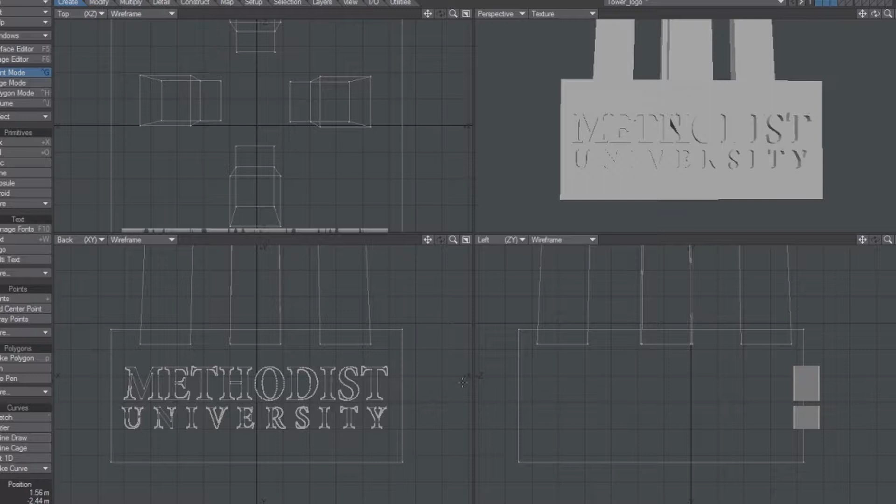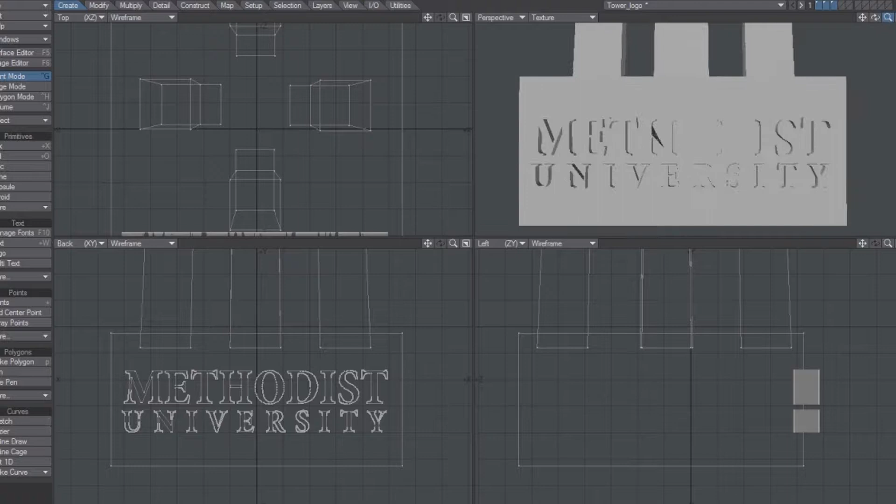Now, another issue that comes up with some fonts and some things in Lightwave is that occasionally we get some impossible geometry when it comes to text. If you look up here, you can actually see some of that. There's a little bit of an artifact right there. I don't think that's going to be a deal breaker. First of all, it doesn't really show up in the model here. It just comes into play when it tries to put it into perspective view and to make the surfaces, even double-sided. You see that there's something there. But in the case of a 3D printed object, I don't think it's going to be a deal breaker.

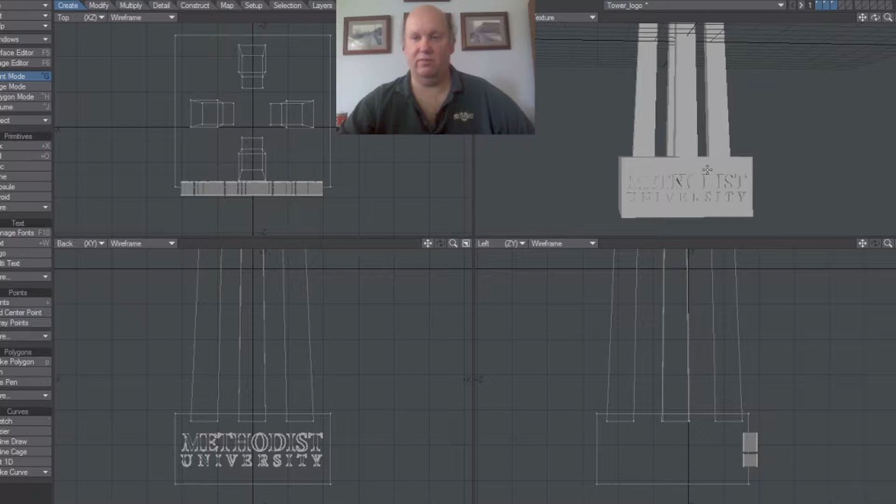Okay, so the first thing we want to do is establish what our pieces are going to be. Now, what I wanted to do is make the tower a different color than the base. So, easily enough, all I've got to do is print out the tower separately. And the base, I want to have a different color than the text. Now that's going to be a little bit more of a challenge.

That will involve printing out this block with the letters added to it as one layer, and then having it printed in such a way that it will print the bottom base first, so from here upward, and then at a certain point when it starts to get to the letters, I will pause the printer and change the color. So we're going to have yellow letters which will glow against a black block, and the tower will be white.

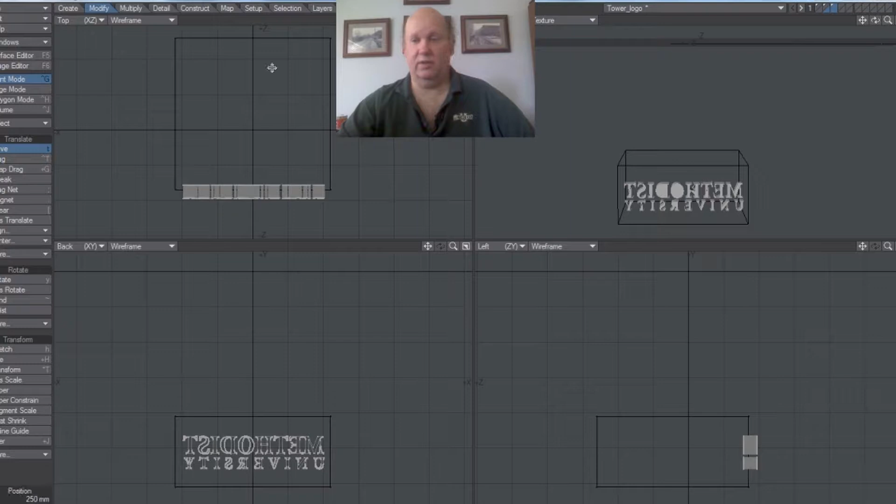So the first thing I'm going to do is adhere the letters to the block. But before I do that, remember we had an issue with the Methodist words coming out backwards. What we're going to do here is turn them around before we even get to that point. So I'm going to do a modify, rotate, and rotate those at 180 degrees. And then I'm going to move those to the front. So already we fixed that problem.

Then we're going to basically put the words in the background, do a construct, Boolean, add. And then we no longer need these. So this becomes our final product.

Okay, and so there's one other thing that we need to do here. What we want to do is make this in multiple parts. And so therefore, what I want to have is the tower actually merged with the base piece so that I can actually glue the tower parts into the bottom part there.

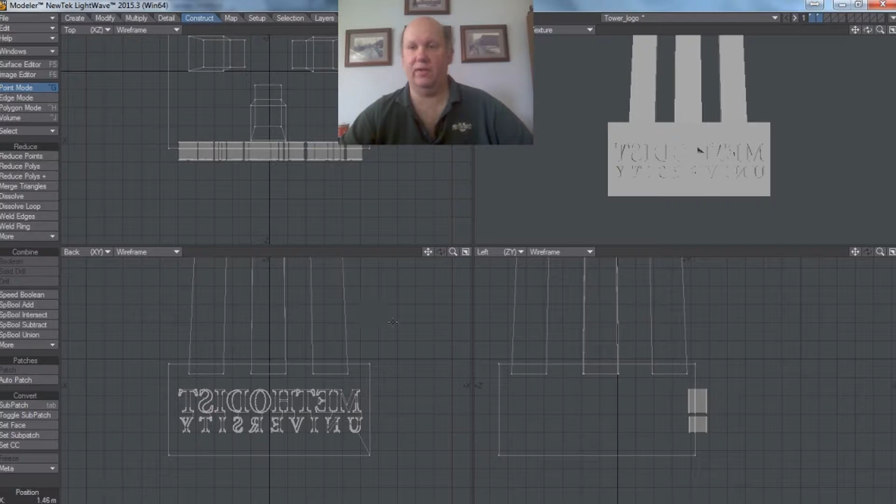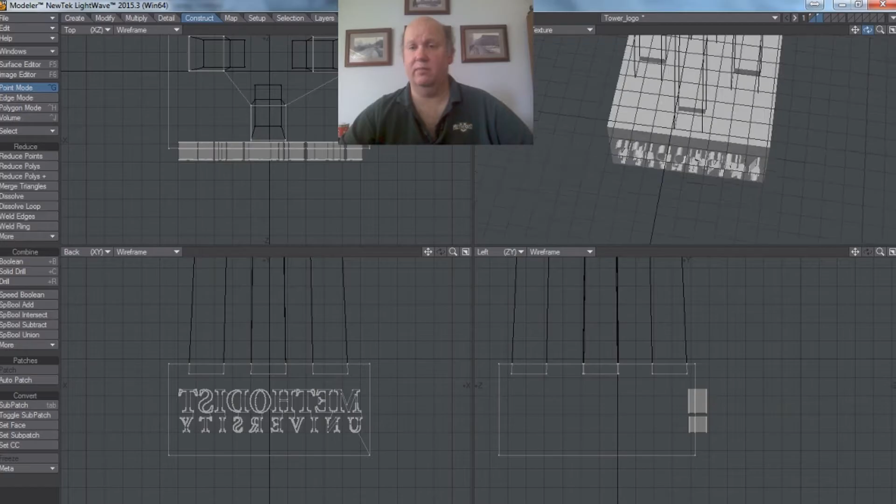So to do that, we're going to make it so that they fit. What I'm going to do is select the base piece and put the tower in the background and do a Boolean subtract. And when I've done that, you will see that the base piece now has places to accommodate those towers.

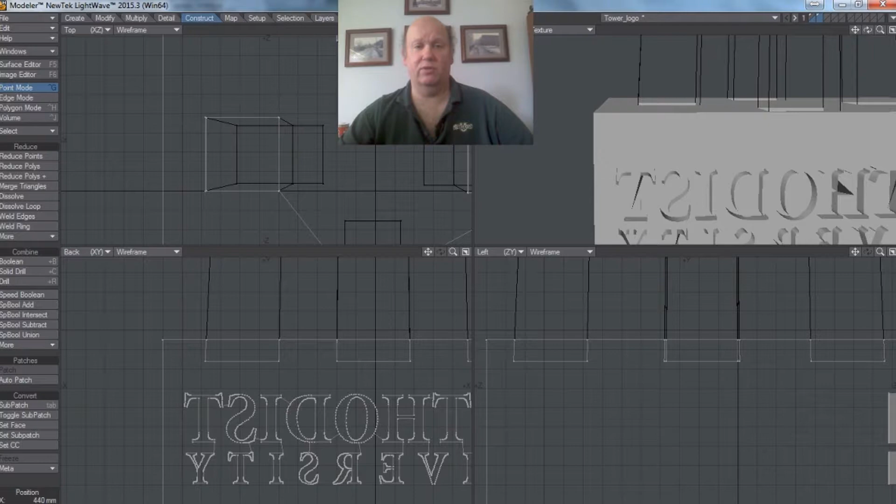So once I've done that, then it's a question of making sure that they would fit naturally. So I'm going to leave the tower in the background, and I'm going to go in on those posts. Go to the first one here, and we want to make just a little bit of a space. So I'm in point mode. I'm going to select just those points there, make it a little easier. And I'm just going to do a modify move, and just bump those up just a tiny bit. Doesn't have to be much. Then I'm going to deselect those points, select those points, and bump that out just a little bit, and bump that out that way.

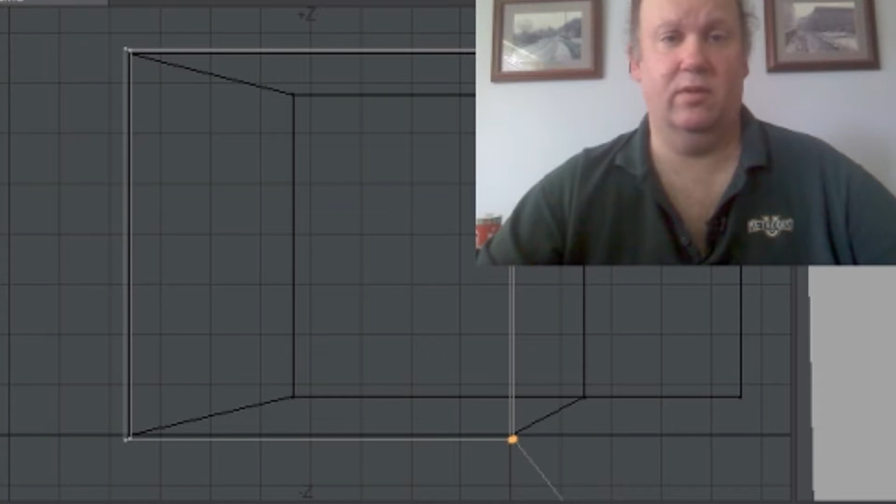And that should do nicely. Down here, you don't have to worry about the bottom one, we're going to leave that the same. But if you look close, there's a little bit of a gap between the tower piece and the legs of the little post hole that's dug for it.

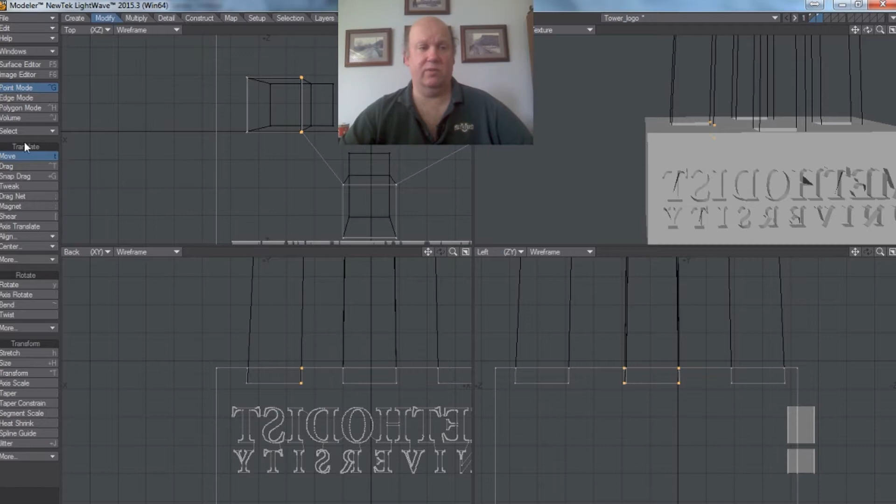So we've got one of them done. Let's say we go on to this one next. And that should give us enough room for those posts. So then basically, all we got to do is export these

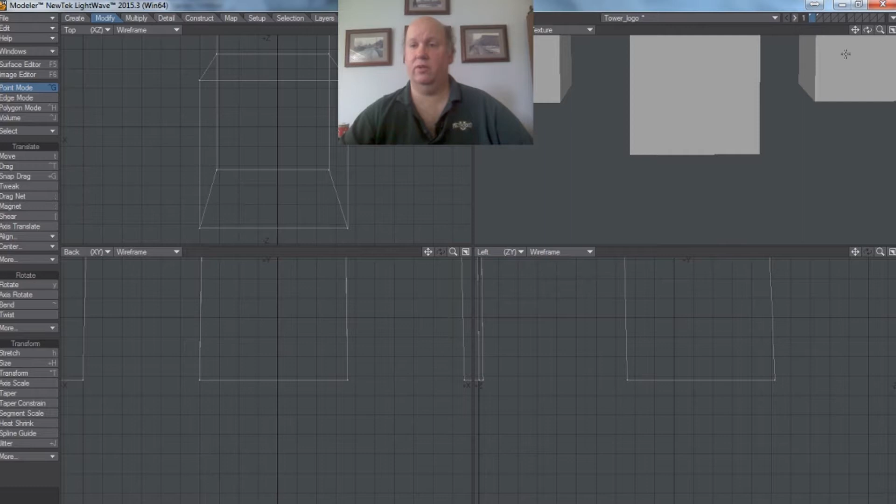as their own STL files. So we'll start with this one, this is the tower. So I do File, Export, STL. I'm going to put that on the desktop, and I'm just going to call that tower underscore top.

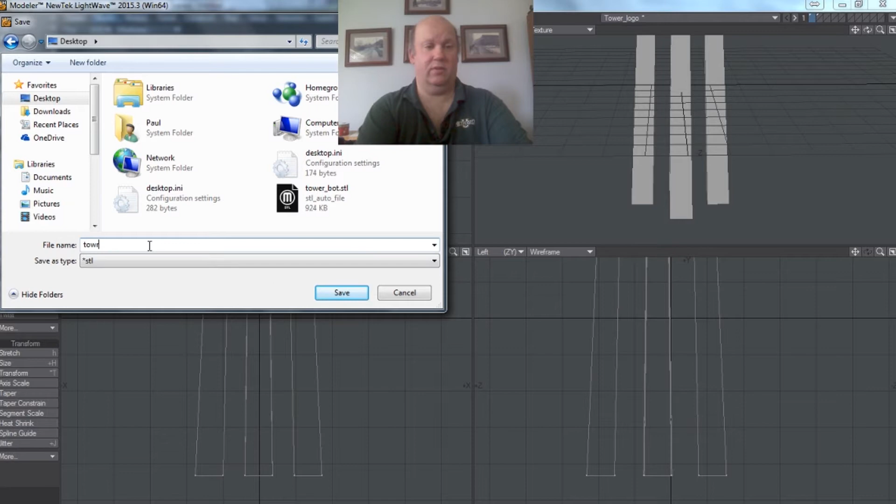And this one, I've already reversed it and everything. File, Export, STL, tower underscore bottom.

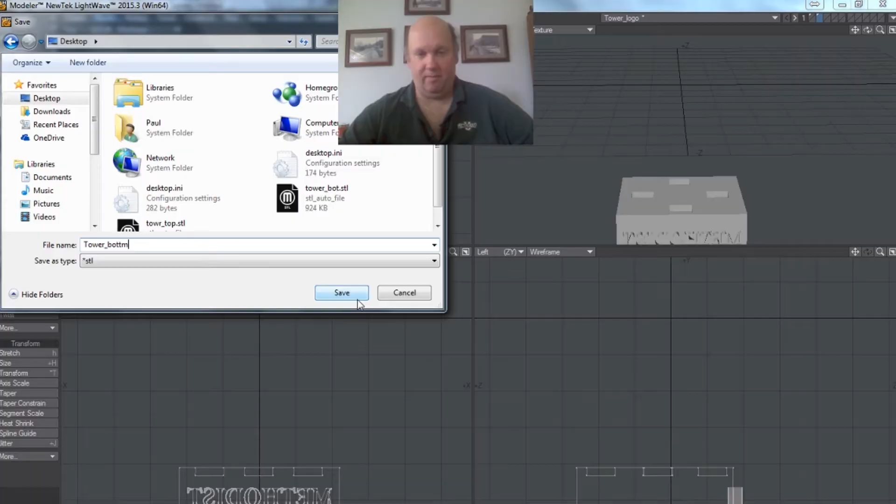And that's it. So now we're back over here at the MakerBot desktop, and we're going to load the individual pieces. So we go to Add File, and on our desktop we've only got two parts.

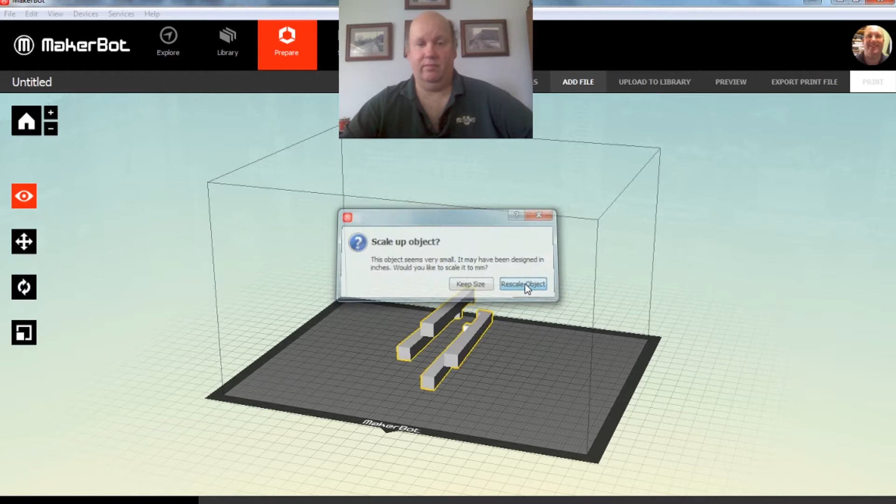So we're going to load the tower top, and we're going to rescale it, and we'll go ahead and print that straight up and down. And we'll lay it flat, and we're going to move that over to the side a little bit like that.

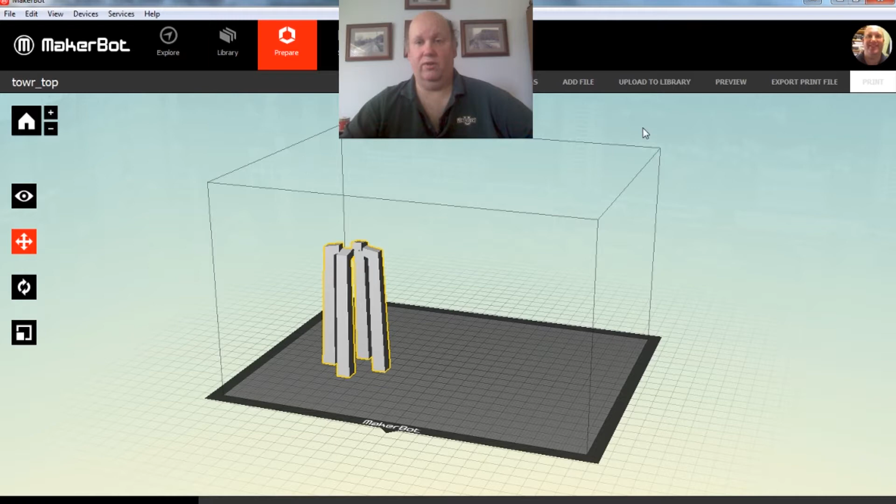And then we're also going to bring in, and I'll show you why in a minute, the tower bottom. Rescale that as well. And that one, remember, we're going to want to print that so that the words are facing up, like so. And we can turn it around that way so we can see the details. And we're going to move that, say, over here a little bit.

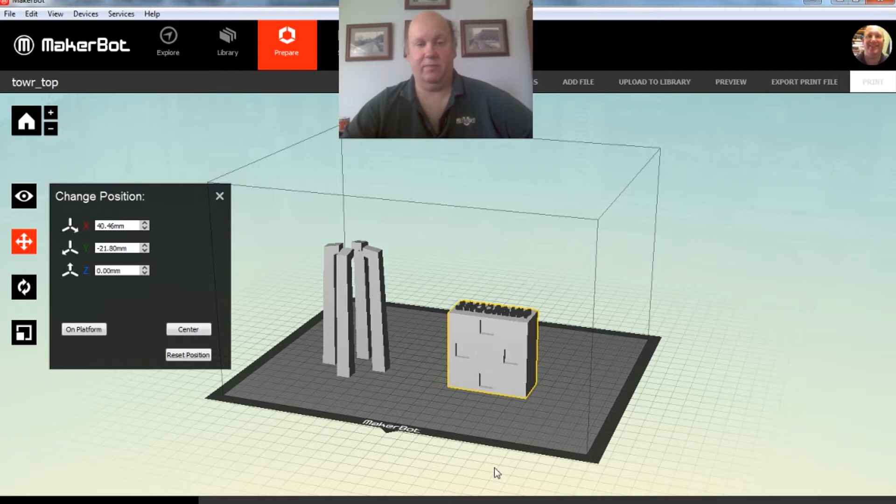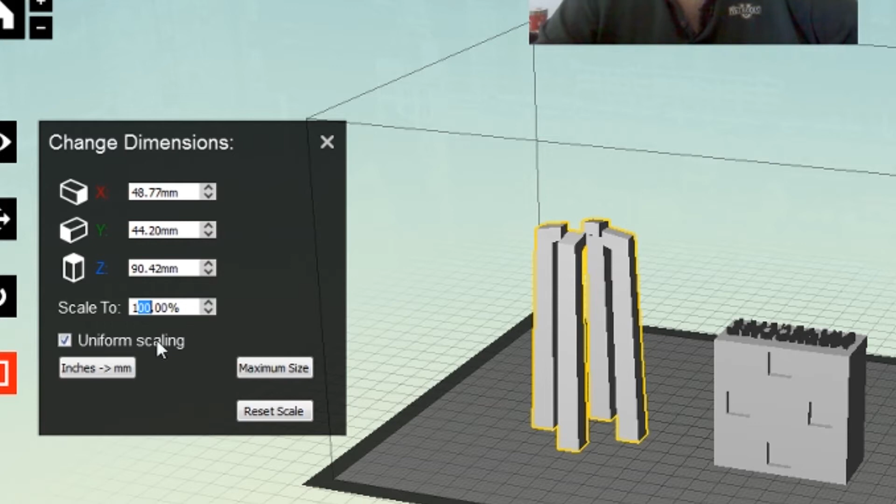Now we want to make these as big as we can. So, in order to do that, if we're going to rescale them, if we were to make that the biggest we could, that would yield 157%. So if I were to simply scale it up by 157%, that is the tallest I can get.

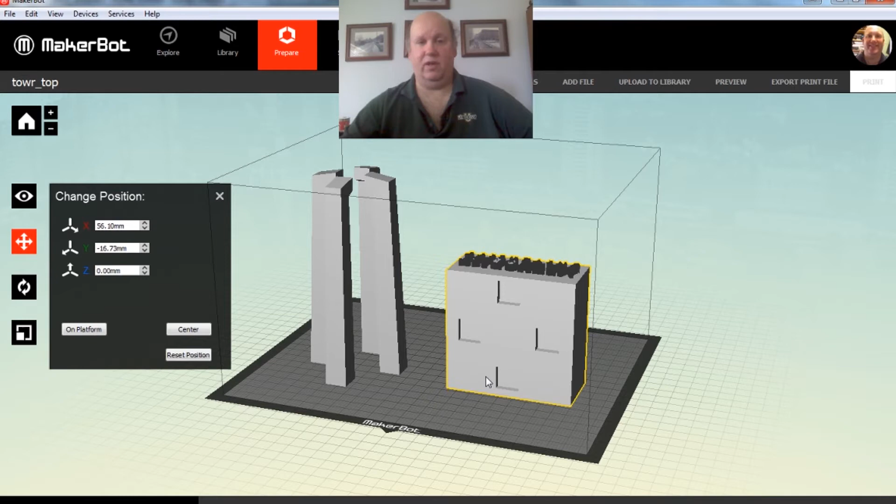So we're going to apply the same scaling factor to the other piece, because these have to be the same scale, otherwise they won't fit. And so there is your object. So what we're going to do is we're going to save this as a thing. Do File, Save, and on the desktop we're going to put tower thing.

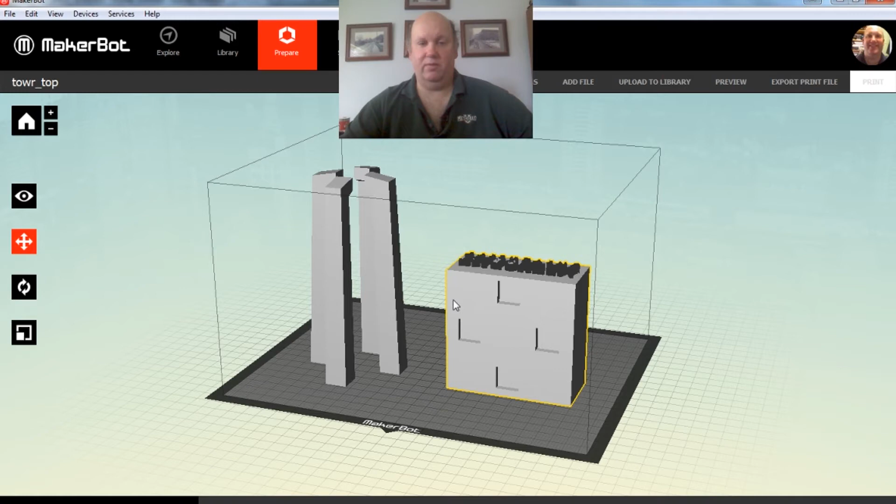And so therefore, when you print it out, you can simply delete whichever one you aren't using. So you can open this up like it is now, and let's say we want to do the tower first. We'll just go ahead and delete this, and we'll do a preview for this one. Okay, so you see here this is the finished rendering that the computer thinks will print.

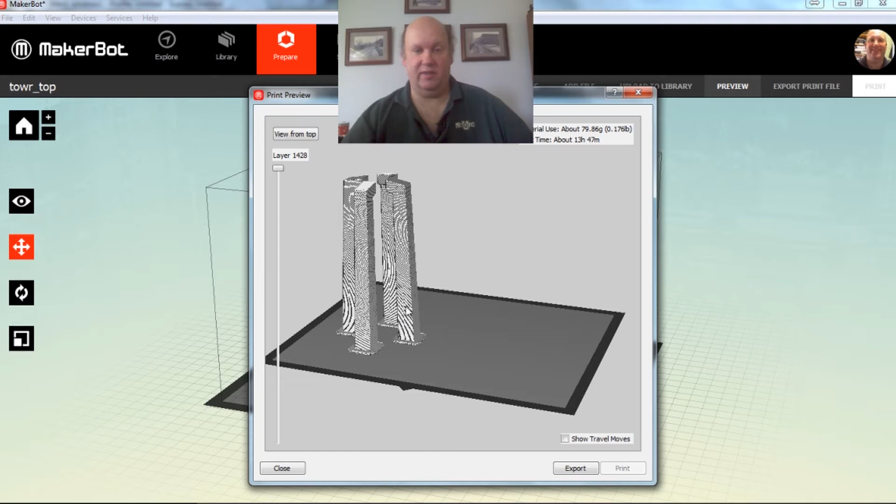You can see that the tower has separate rafts that it's going to be sitting on, and all we got to do is export it, and we're going to put that on the desktop as tower top. We'll just, to be sure, tower top underscore print, and it's been saved.

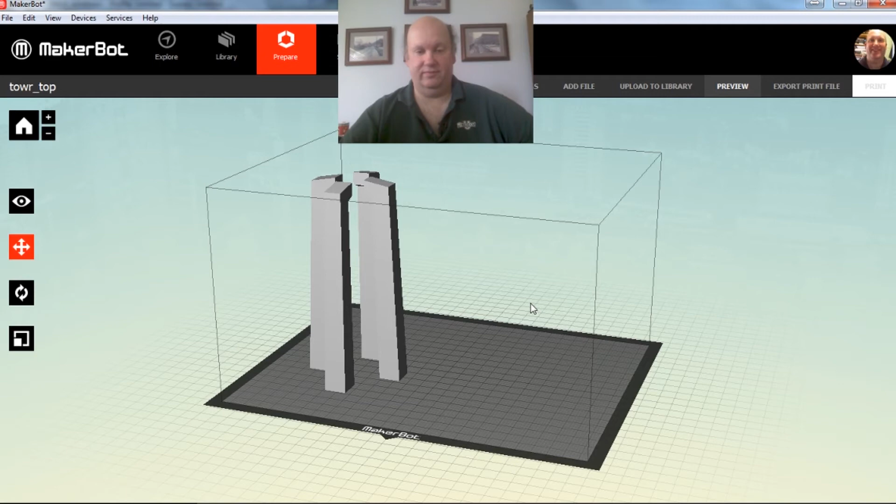Then basically we Control Z it to get back what we deleted. Then we delete this one, and we can move this one anywhere we want. And let's say we preview that as well.

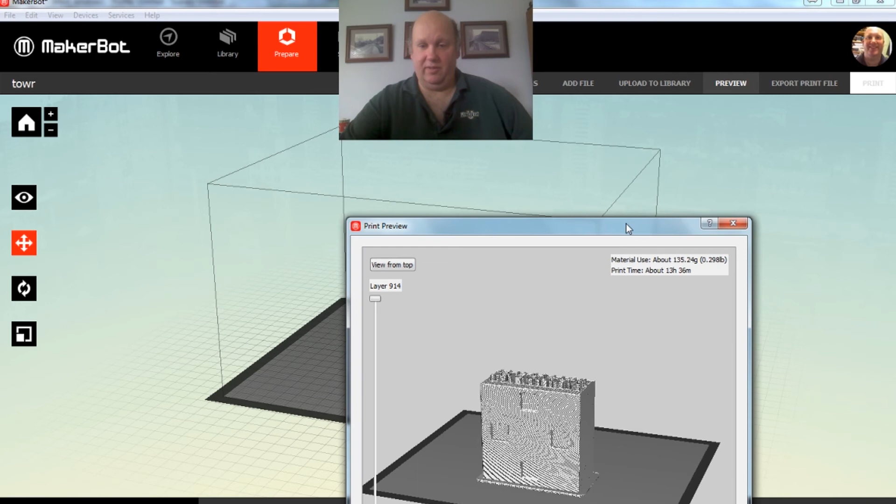Okay, and so here's the second piece, and if we look at this, it appears that the lettering is not necessarily going to be problematic. I don't see that artifact causing any problems, and so we should be alright.

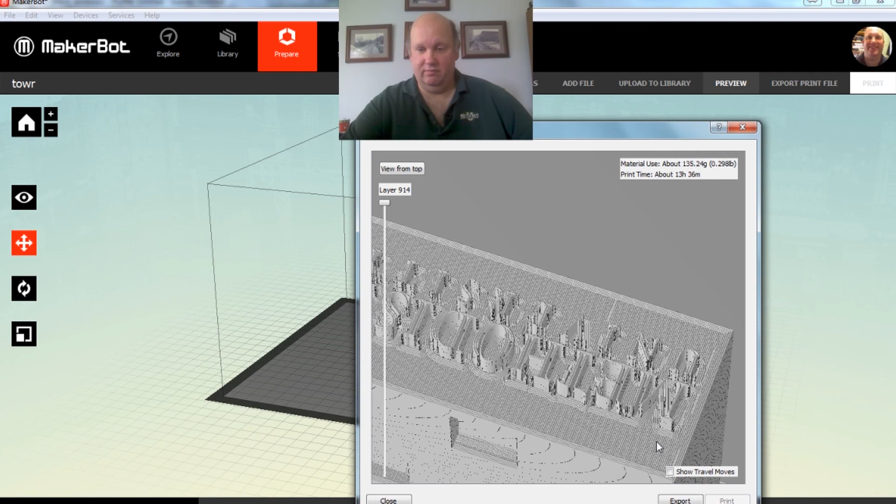So we'll simply export this. And I'll just change that to Tower Bot. And that's it.